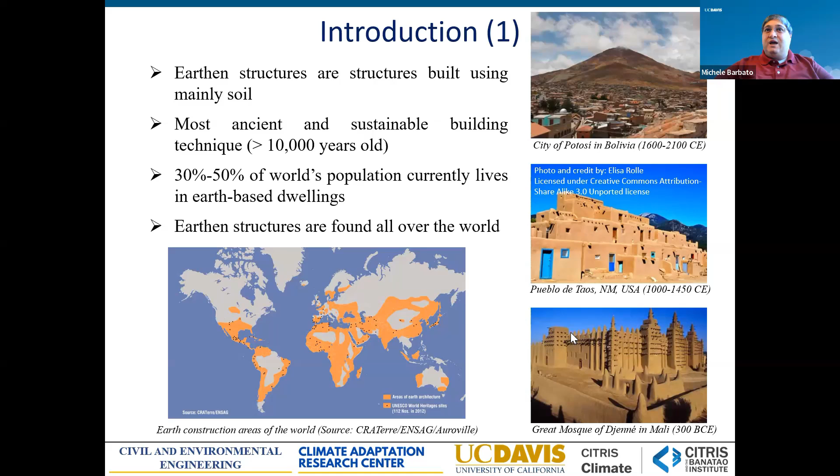And then I have some examples of ancient constructions made by using different technologies based on earthen construction. So it is something that is ancient. And it has been used in different flavors, typically cob, rammed earth, and adobe across the world. These three technologies are slightly different. In cob, fundamentally, you have a slurry of soil that is layered to build walls. In rammed earth, you are using a machine to compact the walls by ramming into them on both sides.

And in adobe, we have probably the most known technology, that is fundamentally a masonry done with bricks that are dried under the sun and then used for construction. Obviously, these are historical technologies. They are important a lot for conservation of existing construction, but there is also a modern flavor to it. And a modern flavor is done by different technologies based on earth blocks.

The three different flavors are compressed earth blocks, where the soil is mechanically compressed to increase the strength of the different blocks that are done without any firing, but only with mechanical energy. Stabilized earth blocks are obtained by adding a chemical stabilizer, typically lime or cement, to increase the durability of the block. And then compressed and stabilized earth blocks, which is the technology that we are working on at UC Davis,

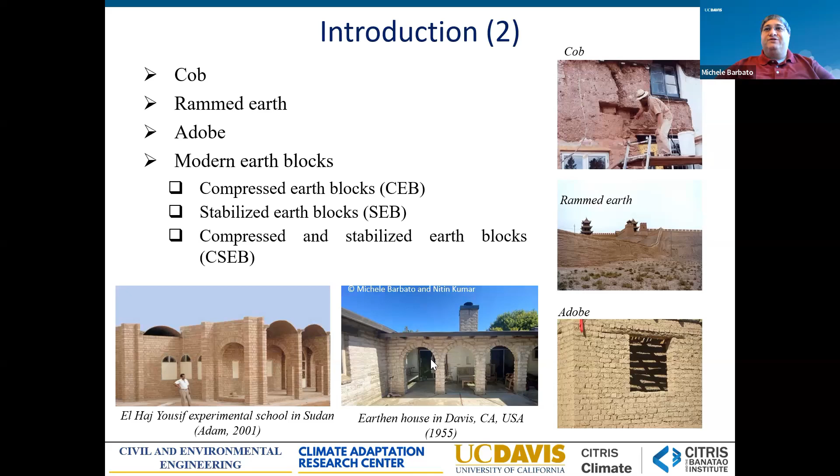where the two technologies are put together to have a block that is at the same time mechanically sound and strong, but also durable under different weather conditions. And again, you can see different examples here, even modern examples of usage of the compressed and stabilized earth block technology, that are, again, very resilient types of structures. So why are we going back to something that is so ancient and trying to give a modern flavor to it? There are actually several reasons.

From one practical point of view, it's the shortage of housing in the US and in other countries, particularly the shortage of affordable housing. And this material is a locally available material that is extremely cheap compared with any other type of construction material. In a larger view, there is a big need for new housing. It is estimated that more than 2 billion new houses will be needed worldwide in the next 80 years, which is a huge amount of housing. This is both for the increase in population, but also for the improvement of living conditions.

And if we are looking at this need, we need to come up with a technology that is also sustainable. Otherwise, we are not going to be able to reach our goals in terms of reduction of our carbon emissions. So there is a need, and this material could be a solution. There is also an interest from a purely engineering point of view. This material has been used for a very long time, but has not been studied as deeply as other industrial materials. It has a very different mechanical behavior than that of ordinary masonry, and we will see that in the next part of the presentation.

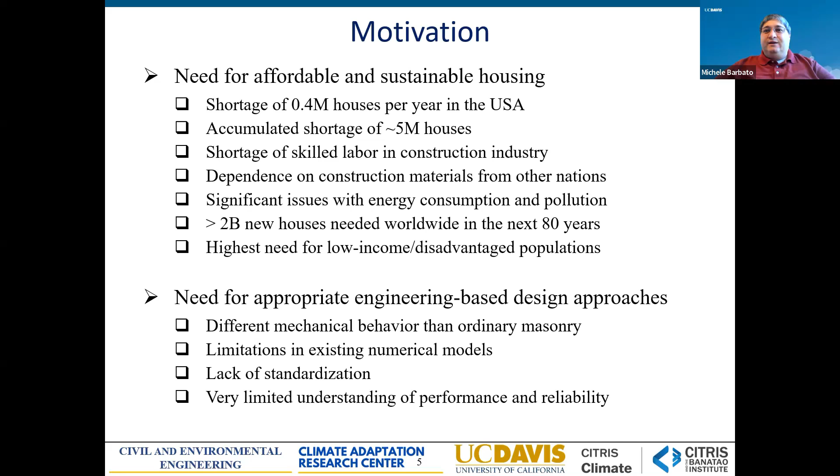And the existing numerical methods that are used for ordinary masonry do not work well for this type of construction. There is also a problem of lack of standardization and a very limited understanding of the performance and the reliability of these structures, which is something that is needed if you want to have an adoption at scale of the technology. So, what are the advantages? The first one is the material is affordable and locally appropriate.

Here there is a USGS map of the classification of the soil across the United States, and then the triangle of classification used by the US Department of Agriculture. If you look at the region included in the red line, this is the composition of soil that can provide earth blocks that are performing well from a mechanical point of view without any addition of chemical stabilizers. If you look at the region included in the dashed yellow line, you actually see how this composition can be expanded by using a moderate or small amount of chemical stabilizer.

When you map it onto the United States map of soil, you actually find that almost everywhere, except in the deltas of rivers where the amount of expansive clay is very high, you can find soil that can be directly used for construction of structures by using compressed and stabilized earth blocks. The fact that the material is locally available makes it extremely affordable. There is a reduction in cost on transportation, and obviously whenever there is that reduction, there is also an additional advantage of reduction in emissions.

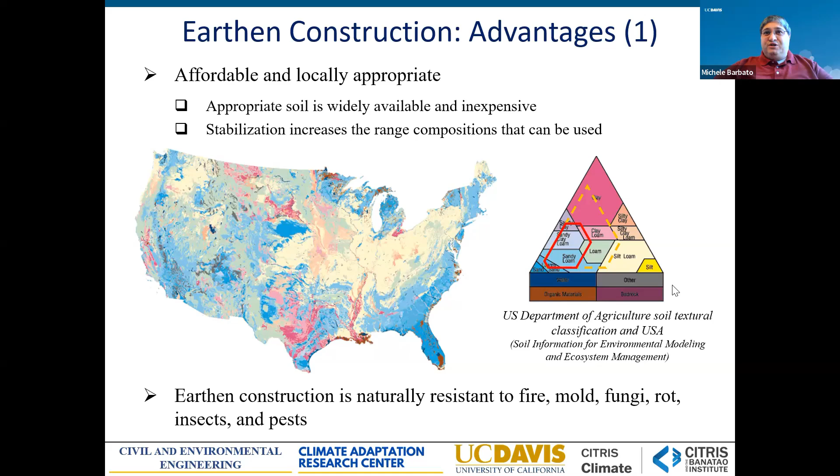In addition to that, the structures made with this material are naturally resistant to fire, mold, rot, insects, pests, and termites, because it's fundamentally soil, and these type of actions cannot damage soil. Also, this is a breathable material, able to maintain a healthy relative indoor humidity by taking excess humidity out of the air when it's too humid, and releasing it back when it gets too dry. So it's a natural way of keeping indoor humidity in a healthy range. It also doesn't release any volatile organic compounds that can be bad for human health.

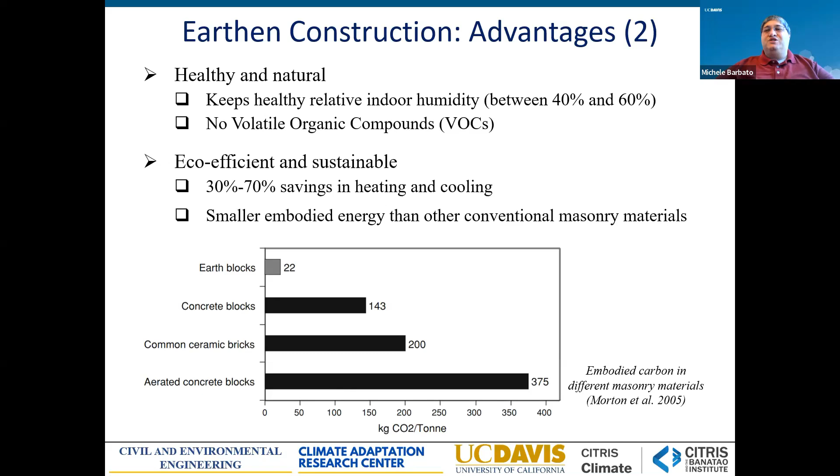And then it is eco-efficient and sustainable. On the side of operational energy, it has been shown that it can produce a 30 to 70% savings in heating and cooling compared with a light-framed wooden house, depending on the climate where it is built. But also, it has a smaller embodied energy than other conventional masonry materials. Here you can see the equivalent CO2 per ton of material in kilograms for earth blocks compared with concrete blocks, ceramic blocks, fired clay blocks, and aerated concrete blocks.

So the embodied energy is lower and the operational energy is lower. In addition, recent research, some of which was performed by my research group with collaborators, has shown that this type of construction has good resistance to hurricanes, tornadoes, and with appropriate reinforcement, also earthquake actions.

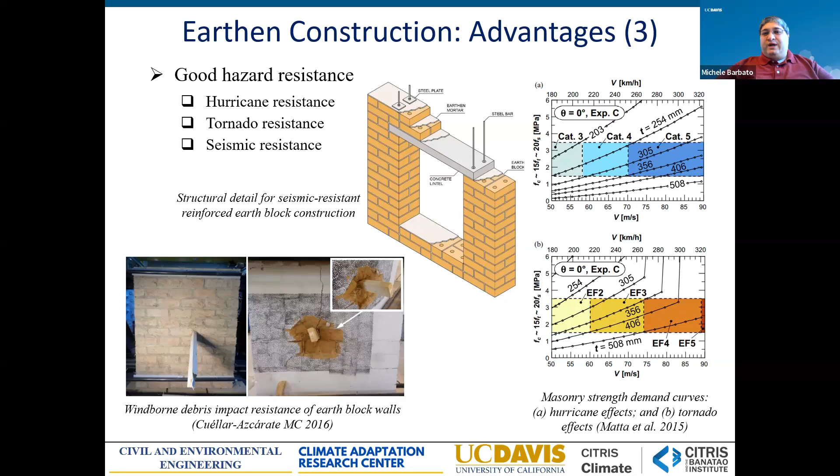So with all of these nice things, there are obviously also challenges. Otherwise, we would already see this type of construction used in modern construction everywhere. One issue is the high variability of the mechanical properties. This high variability comes from the fact that the material is a natural material, and thus there is less possibility of control than with industrial materials that are produced under very controlled conditions. The result is that there is higher dispersion whenever mechanical testing is performed.

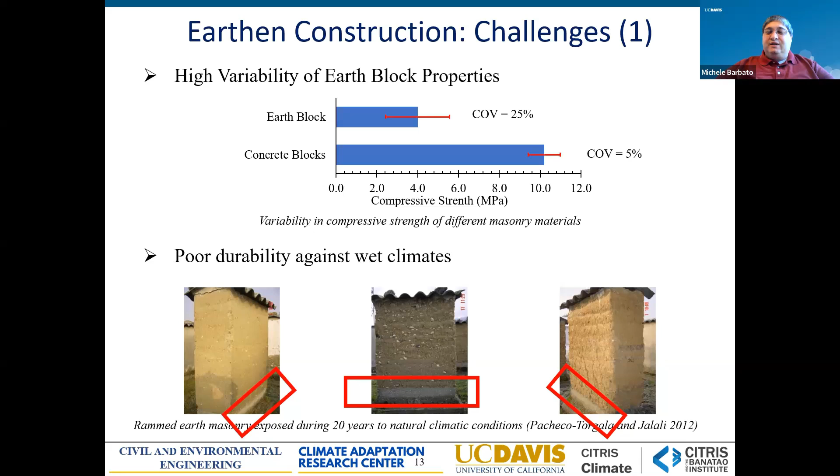There is also an intrinsic problem with any type of earthen construction, which is poor durability in wet climates. There's a historical test that was done on a rammed earth wall that shows how humidity from the ground, coming up and down through capillarity, can produce damage in the walls. In addition, it is a masonry product, so it has an intrinsic characteristic of brittleness, which means it reaches its peak strength and then breaks really, really fast.

In addition to these technical issues, there are some other issues that are beyond technical. One is that it's labor intensive, meaning it's costly in places where labor is expensive. And the worst issue, even though it's not technical but more cultural, is the perception that earthen construction is a substandard choice when compared with other modern industrial types of construction.

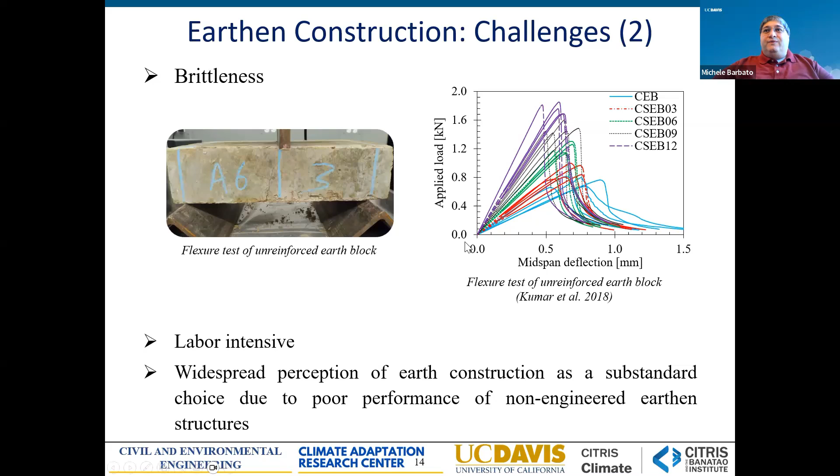But this perception is really driven by the poor performance of non-engineered earthen structures in different parts of the world, to which I would add that when a structure is not properly engineered to sustain the loads that will be applied during its lifetime, any type of material will perform poorly. So there are technical issues and cultural issues that need to be addressed.

To give a better idea of what we're talking about, I'm showing some of the blocks we can produce using soil. These are compressed and stabilized earth blocks of different shapes. You're seeing in the video some of our students building a block, fabricating it using our first version of a modified Cinva Ram manual machine for making blocks. As you can see, it's quite a laborious process.

However, you can also see in our picture a machine, an Auram press, a semi-automatic hydraulic press that makes this work significantly faster and less laborious. With our original Cinva Ram, we were able to build about 30 to 40 blocks per hour, with a crew of students exchanging positions. With our hydraulic press, we can produce between 300 and 400 earth blocks in the same hour of time.

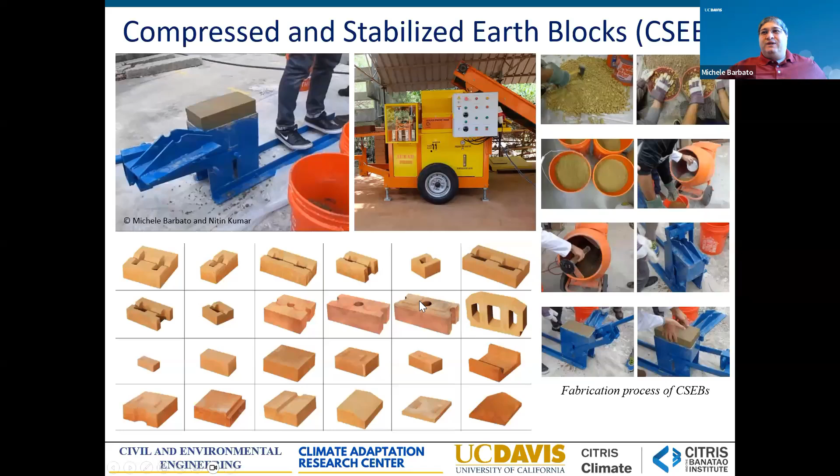Now we know what we are talking about. I want to present a couple of studies that we completed several years ago.

One on the feasibility of using these houses, and I will start with that. This was a feasibility study performed in the U.S. Gulf Coast, in the Gulf of Mexico, precisely in southern Louisiana. This study was trying to address the need for affordable hurricane-resistant housing in southern Louisiana in the aftermath of Hurricane Katrina.

There were about 400,000 low-income households in need of housing. The place was particularly bad for this type of construction. One, because the soil quality is poor. Again, we are close to the delta of the Mississippi River, with a lot of expansive clay. The climate is hot and wet, which is also difficult for earthen construction. And then we have high wind loads from frequent hurricanes affecting that region, and we needed to keep the cost low. We also needed solutions that were culturally appropriate so that people would feel comfortable using these type of houses.

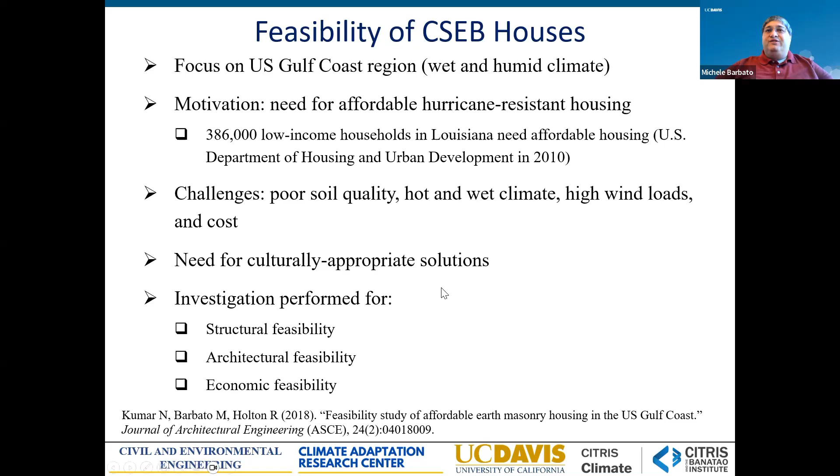We investigated the structural feasibility, the architectural feasibility, and the economic feasibility of these homes.

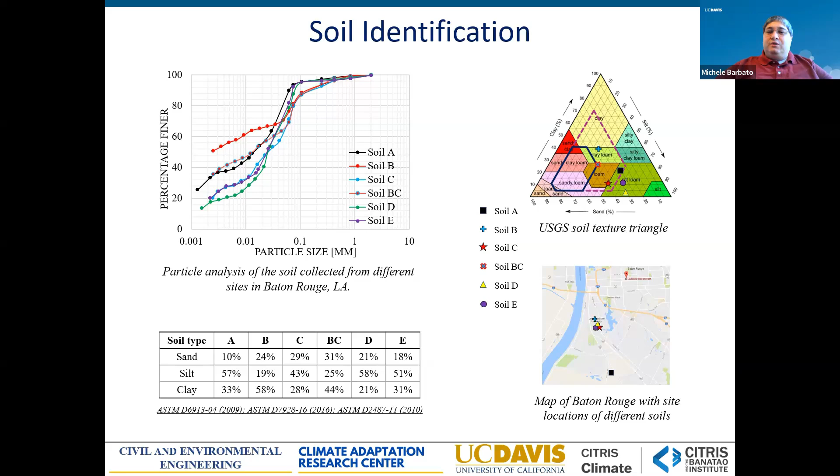We started by identifying the soil. We took soil from around the campus of Louisiana State University, along the Mississippi River. If you look at the USGS soil texture triangle on the right top of this slide, you will see that all of the soils we found were outside of the optimal region identified by this blue line. But most of them were inside the region where chemical stabilization could be adopted to build this type of construction.

So what we did, we used cement to improve the mechanical strength and durability of this material. We started with a block made with only soil, and then we added cement, from 3% of the mass of the dry material up to 12% cement.

And then we performed flexure tests, compression tests, and durability tests, and the compression tests were performed both in dry conditions and in wet conditions.

What we found is that most of our compositions had a sufficient modulus of rupture, the value obtained from the flexure test that really measures the behavior in tension and the brittleness.

Then with at least 6% cement, we had sufficient compressive strength. And then in order to achieve a compressive strength under wet conditions as suggested in the literature, we actually had to use a relatively large amount of cement, 9 and 12%. Again, this is mainly due to the fact that the soil was not the best soil to start with.

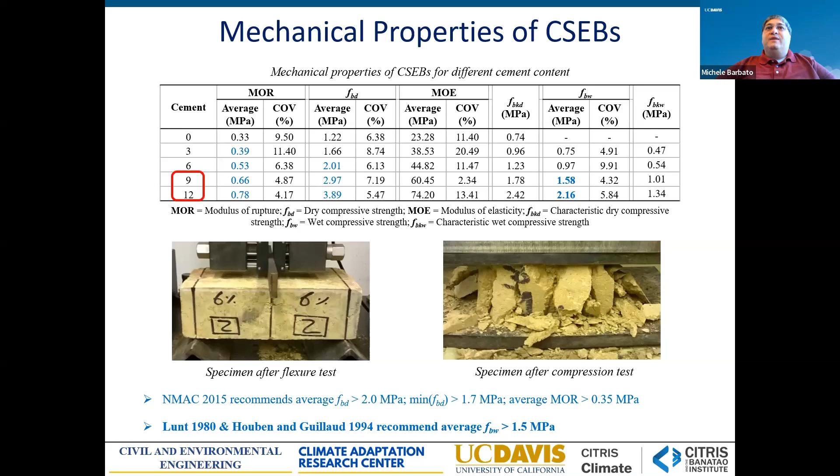The first issue we wanted to identify is how do we protect this material from the wet, humid conditions of southern Louisiana. Here you can see the results of a test we did by building a small wall outside of the LSU campus, where one side of the wall was protected with a composition of soil and cement similar to the one used for building the blocks, and the other was left unprotected.

You can see that on the unprotected side, very soon... this was a 6-month test during which we actually had two tropical storms, so it was short but pretty intense as a test. On the side left unprotected, the mortar between the blocks is washed away by the heavy rain and wind, and this produces mechanical damage to the bricks, which are no longer fully connected.

On the other side, the one protected by our soil cement—let's call it stucco, although it's not really a stucco, just a layer of protection—we actually see no damage. Not only that, but when we finished our 6 months of testing, we carefully dismantled the blocks from both sides and retested them for both flexure and compressive strength. What we found was that the protected side actually ended up being stronger than the initial strength obtained from the blocks before they were put in place.

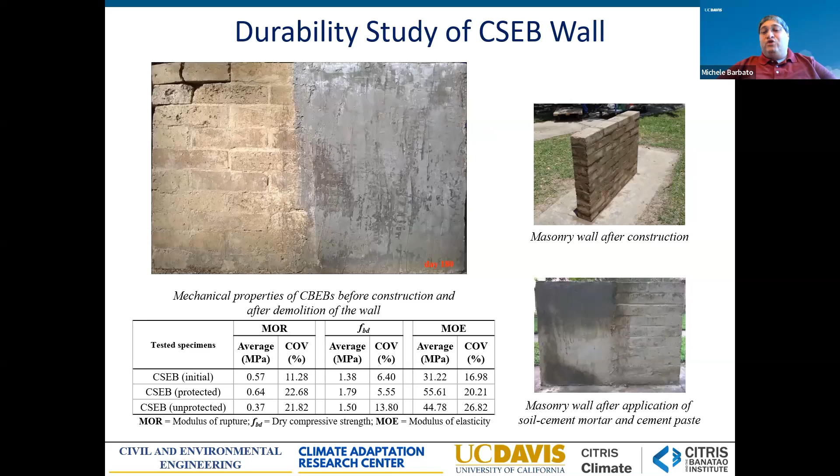We performed further investigation of the engineering performance of these houses subjected to wind actions. We came up with this graph that allows us to design the needed thickness of the wall in order to design according to ASCE for different wind speeds at different locations in Louisiana. On the horizontal axis we have the design wind speed from ASCE. The vertical lines are the wind speeds corresponding to different towns in southern Louisiana. The horizontal lines are the mechanical strength of the blocks with 9% and 12% cement, and the other colored lines correspond to the different wall thicknesses needed to sustain each design wind speed.

So, for example, if we want to design a house for New Orleans, which has a design wind speed of about 65 meters per second, we can use a 9% cement block with a thickness of 35 centimeters, the purple line, or we can use a 12% cement block with a thickness of 30 centimeters, the red line.

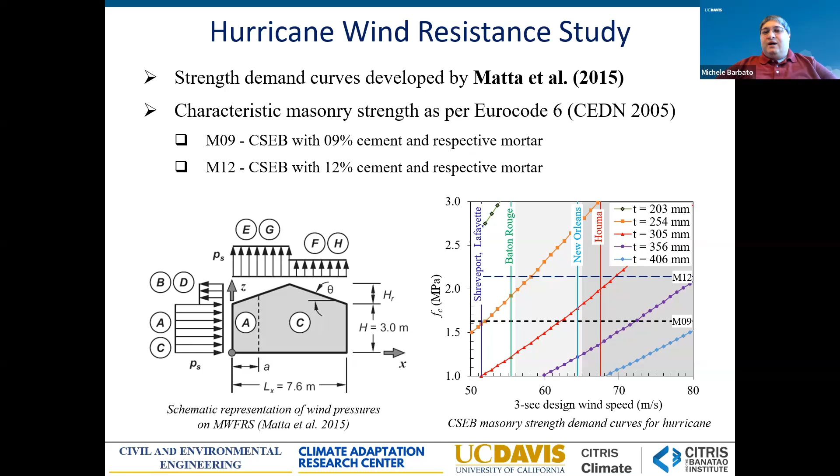We also did an economic feasibility study, and here we devised a new technology for building these structures that are typically built using brick and mortar approaches. We developed a technology based on interlocking blocks that can be done without having to use mortar to transfer the lateral loads across the different blocks.

We compared the cost of this new technology, the interlocking compressed and stabilized blocks without mortar, to ordinary CSEB with mortar, light frame wood construction, which is typically used in 95% of housing in the US, and fired clay bricks and concrete blocks.

Fundamentally, the difference in cost comes from the wall construction. We found that by using an interlocking construction without mortar, we were able to match and even be a little lower than the economic cost of building a light framed wood structure. This comparison was done for a reference shotgun prototype house of 1,000 square feet. So there is actually the possibility of building these houses at a lower cost than the current technology of light frame wood.

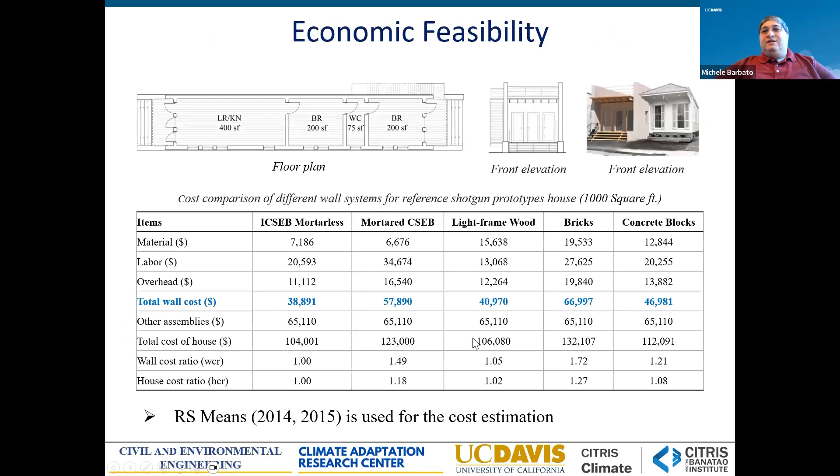Given this result, we started investigating how to predict the performance of this type of construction. We started developing a micro modeling approach for finite element modeling of this earthen construction. Here, just to give you an idea, there are two main approaches.

The micro modeling approaches used for masonry: there is the simplified micro modeling approach, where the masonry units and the mortar are modified in order to reduce the computational cost. Fundamentally, the mortar layer is reduced to a zero thickness joint interface, and the masonry units are expanded to account for half of the thickness of the mortar layer. This allows a significant reduction in computational cost because all of the nonlinearities can be attached to the mortar joint interface. This is valid as long as the failure modes of the system all happen along the mortar, which is typically the case for ordinary masonry, where the mortar is typically the weak spot in the structure.

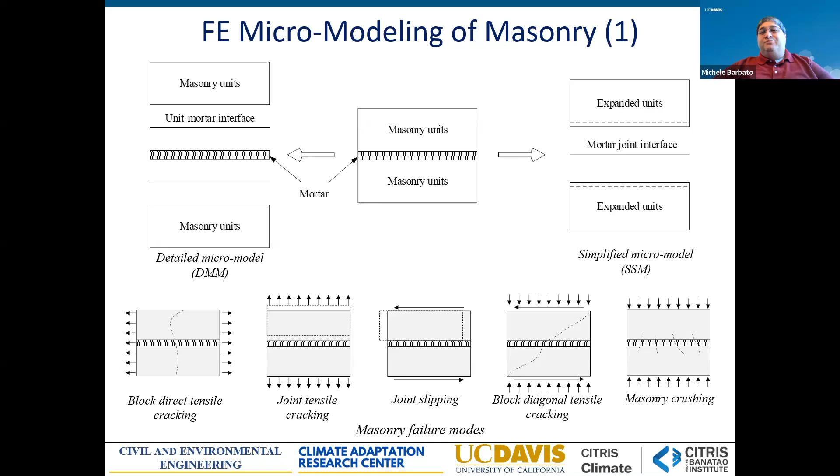However, there is also another approach that is less used because it's more computationally expensive: the detailed micromodeling, where all of the different components—the masonry, the mortar, and the interface between masonry and mortar—are modeled separately and independently. This is called a detailed micromodel approach. In the literature, you will find very few applications of this methodology because for ordinary structures, it is more expensive but gives similar results as the simplified micromodel.

I'm going to show it here. By using the detailed micromodeling approach for an ordinary masonry wall for which experimental data are available, represented by these black lines, we were able to model the behavior of this structure in a relatively accurate manner. You can see this blue line is our numerical simulation compared with the experimental results. On the left side, you can see the development of the principal stress, principal strain, and plastic strain, as well as the development of cracking within the structure, which again has very good correspondence with the experimental results.

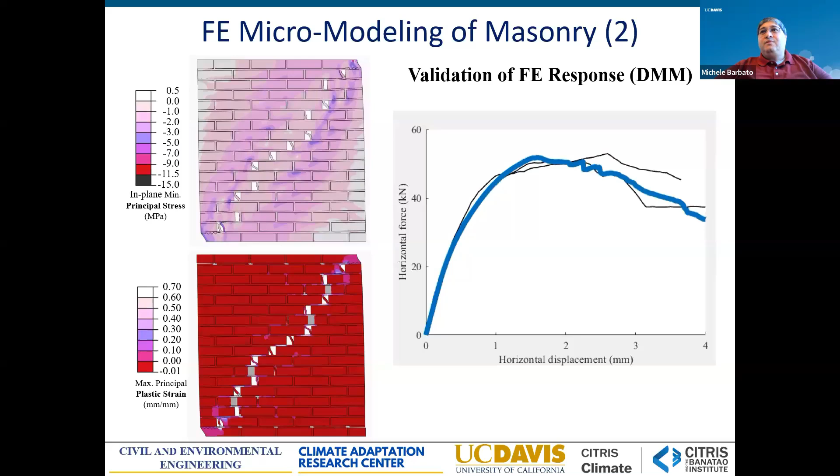So what we found is that by using different flavors of the simplified micromodeling approach and the detailed micromodeling approach, we obtained very similar results. Yes, the detailed micromodeling approach is slightly more accurate, but fundamentally we are capturing the global behavior as well as the development of cracking in the structure using the simplified modeling approach too.

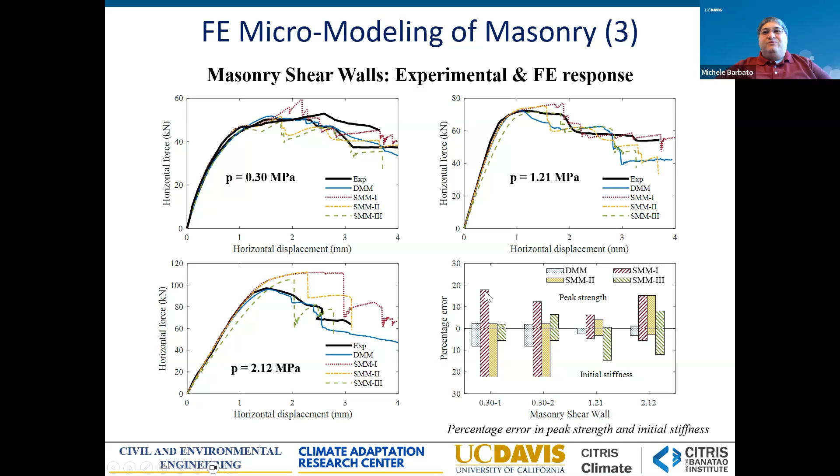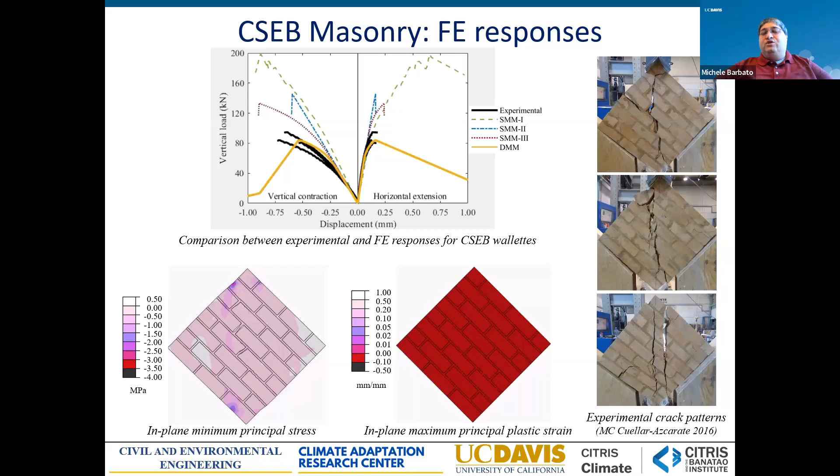This is the yellow line corresponding to this new modeling, as well as the principal stresses and the principal plastic strain in the wallette, where the light color corresponds to where the cracking is developed. You can see that even visually there is a very good correspondence with the experimental results. So as a conclusion, this type of modeling, although more expensive, is necessary in order to capture the real mechanical behavior of earthen construction.

Now, these were two projects that were completed. I'm going to move on to something that is still ongoing, but extremely exciting: the use of earthen construction for homes that are fire resilient. Here you can see why we want to use this material for houses built in the wildland urban interface, because fundamentally earth blocks are non-combustible materials while we are building with wood right now.

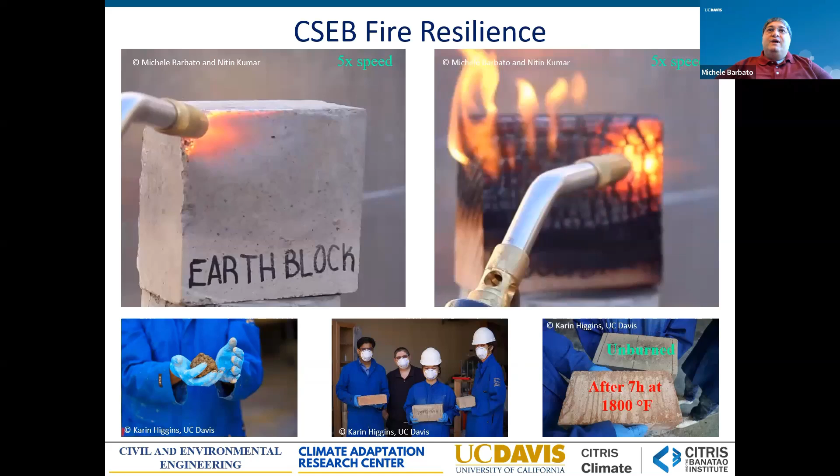And wood obviously burns. Not only that, but you can see that fundamentally, even under a propane torch at 3400 Fahrenheit, the only effect you can see on our blocks is a change in color. We tested our blocks in a furnace for a very long period of time at very high temperature. I'm going to show some of these results.

We fabricated 60 blocks with the CINVA-Ram using a soil that was collected from the town of Paradise in California, the town that is unfortunately famous for being completely destroyed by the Camp Fire in 2018. With that soil and 9% Portland cement, we fabricated these blocks.

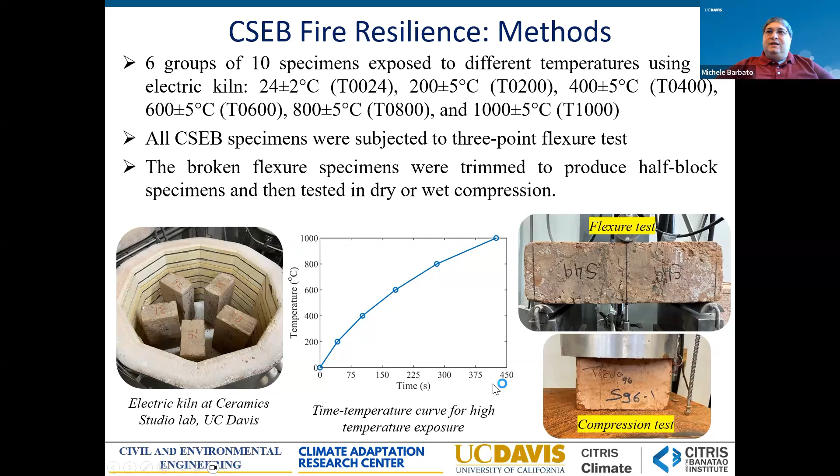Then we divided them into 6 different groups subjected to different temperatures in a furnace. We left 10 blocks at room temperature, and then 10 were tested at 200 Celsius, 400 Celsius, 600 Celsius, 800 Celsius, up to 1000 Celsius for a prolonged period of time. After this, we tested them first on a 3-point flexure test, then took the 2 halves obtained from that test, trimmed them, and used them for compressive strength in dry and wet conditions. So what we found?

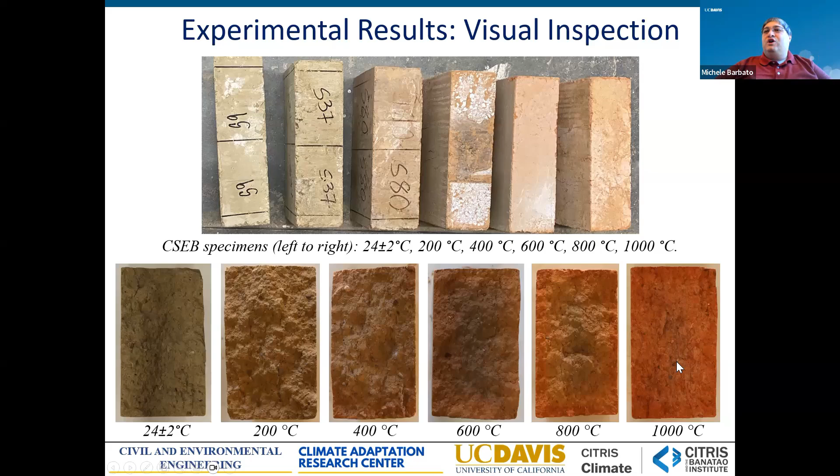In terms of experimental results for the 3-point bending test, we found a reduction in bending strength with a lot of variability, so barely significant from a statistical point of view, but absolutely not negligible. However, even at 1000 Celsius, we found that the final modulus of rupture is still above the minimum requirement of the New Mexico Administrative Code, which right now is the only code in the US that really allows construction using this type of material.

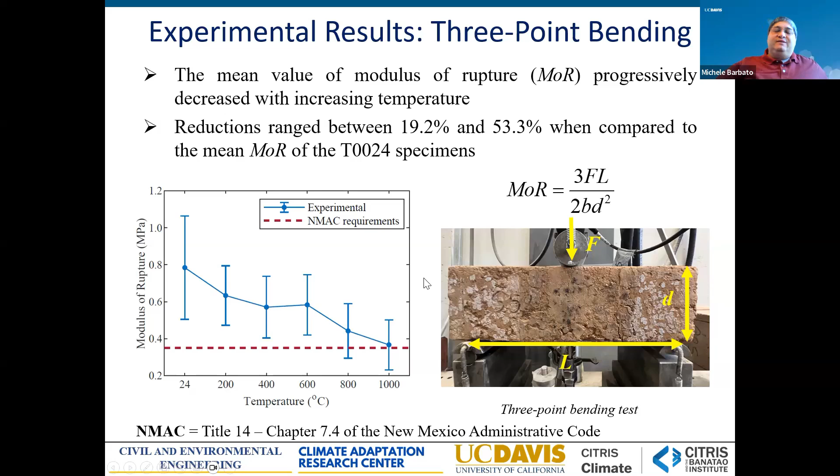We actually found that the reason for this reduction of strength was the high amount of cement. So we are investigating ways of making these blocks more resilient to fire and more sustainable. However, there were other things that were also interesting.

We did these compression tests, and in the dry compression test, again there is a slight decrease of strength from 200 to 600 degrees, and then a stabilization. But in reality, this reduction is not statistically significant. So from a statistical point of view, there is no reduction in strength for the dry conditions.

However, for the wet compressive strength, and this was a little bit more surprising although in hindsight it made sense, we found that the strength is actually increasing significantly. We went from about 2.5 to almost 8 megapascals of wet compressive strength. That is because we are fundamentally transforming our unfired clay blocks into fired clay blocks with fire, which are known to be equally resistant under wet conditions. So the material actually got stronger.

And so all of this is kind of indicating that the material can be used very effectively to obtain a structure that will not burn under fire, and that will still keep its structural integrity to be reused even after fire.

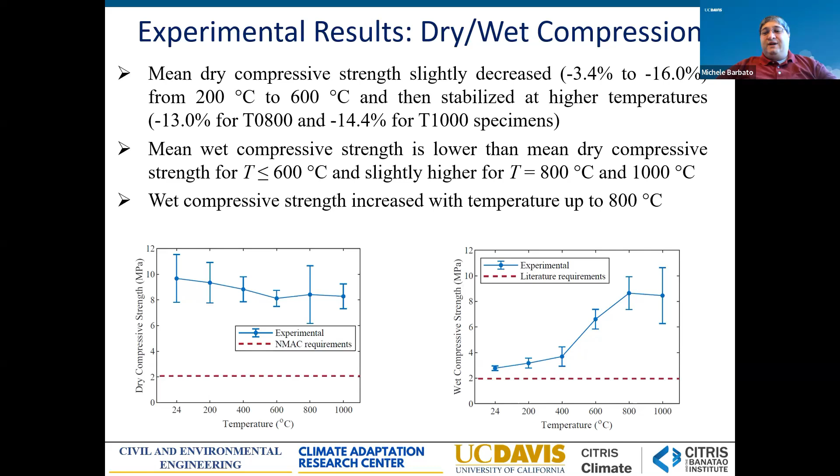Another thing we are investigating right now is assessing wildfire emissions from housing. The idea is to get information about the houses, burning conditions, and emission factors from controlled lab experiments to estimate the CO2 equivalent produced by a house built with different technology that is burning. When we combine this with the life cycle CO2 equivalent, we can estimate their contribution to emissions. This is part of a closed circular economy approach to housing, where we need to include the effect of wildfire emissions for a good estimate of emissions produced. In this part, I will focus on estimating carbon production from burning of houses.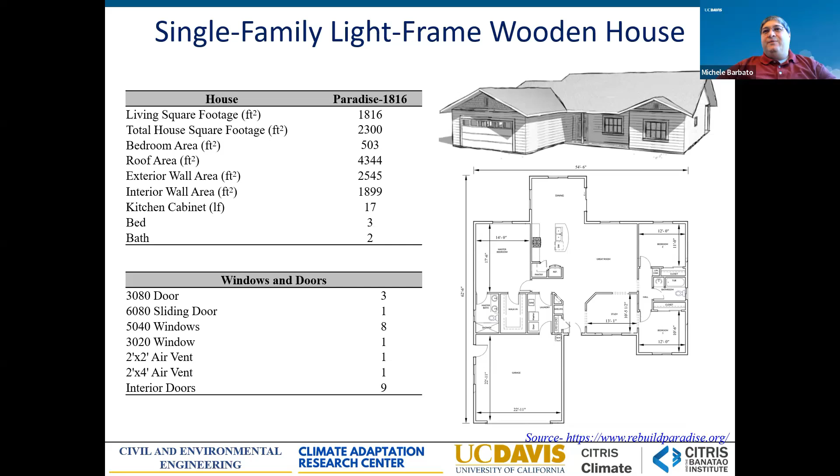The same approach can also be used to assess particulate matter and other pollutants dangerous for human health. What we did was take the design of houses used for reconstruction in Paradise, evaluate all the materials used for construction depending on size, and then evaluate it for different technologies.

In particular, we considered three different conditions: a light frame wood construction that is non-compliant with Chapter 7A of the California Building Code, representative of older structures not in compliance with new building codes; the same light frame wood construction that is compliant with Chapter 7A; and an earth block construction, which is also compliant with Chapter 7A.

In terms of costs, we found that the non-compliant house, as expected, is the cheapest. But the earth block construction, due to the inherent resistance of earth blocks, can actually be built at a lower cost than the California Chapter 7A compliant structure.

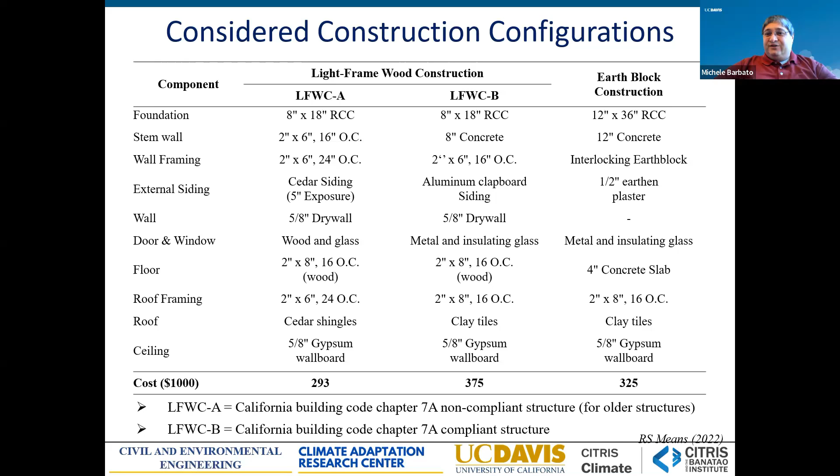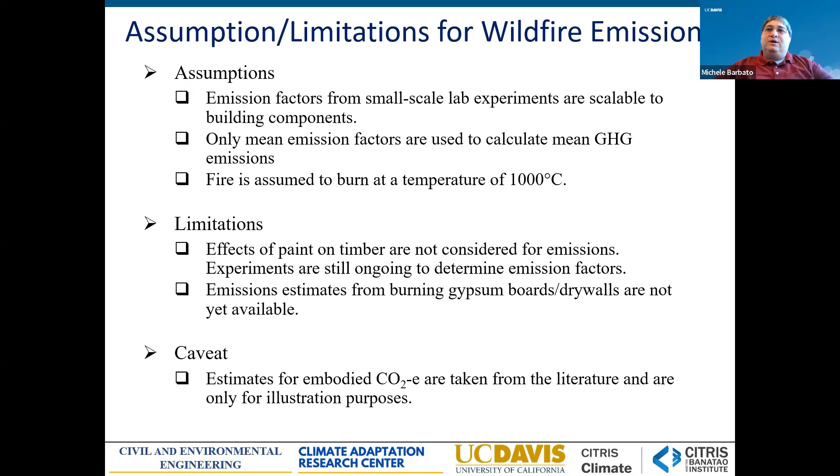We made a bunch of assumptions because we are still calculating emissions factors from small-scale lab experiments. We assume these results can be scaled to larger scale. We did this analysis only using mean values of the emission factors, and assumed the fire is burning at 1000 Celsius. Some elements are still missing, like paint - we don't have the data yet - and some other small or not yet available quantities were also excluded. For some materials where we evaluated embodied carbon, we used results available in the literature.

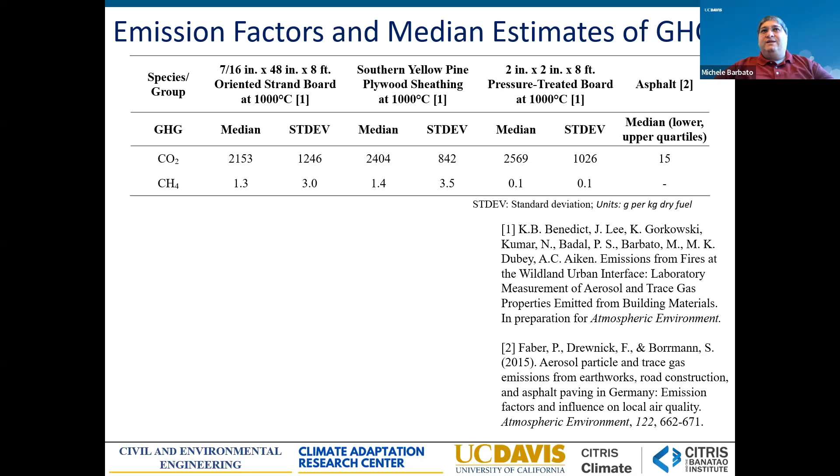So what were we trying to get? We evaluated emissions in terms of carbon and methane, and for each different structure, evaluated the emissions from burning. When we put it together with the life cycle analysis, we found that the earth block construction has an embodied energy that is fundamentally the same as a wooden house.

But if we include the effect of emissions from burning of the house, for the earth block construction, all of the burning and emissions come fundamentally from the content and things that are added, while the entire structure will burn for wooden houses. The end result is that the emissions of an earth block construction are less than half the emissions of a light frame wooden house, with the difference that you still have a house at the end of the day, while for the wooden house there is only ash.

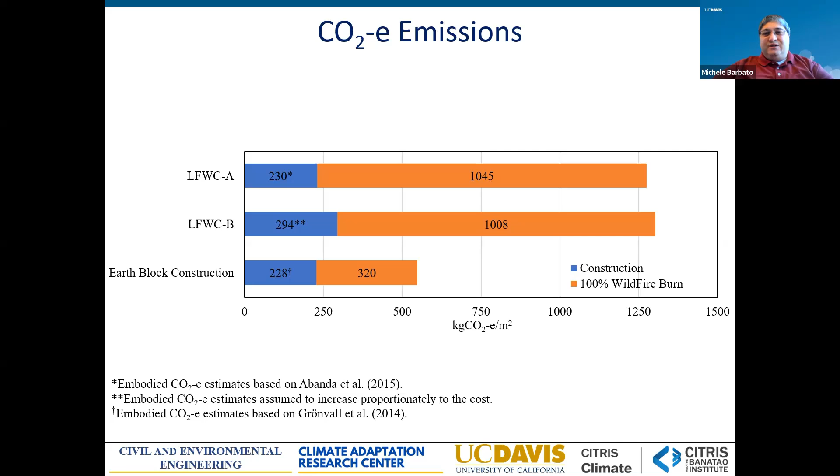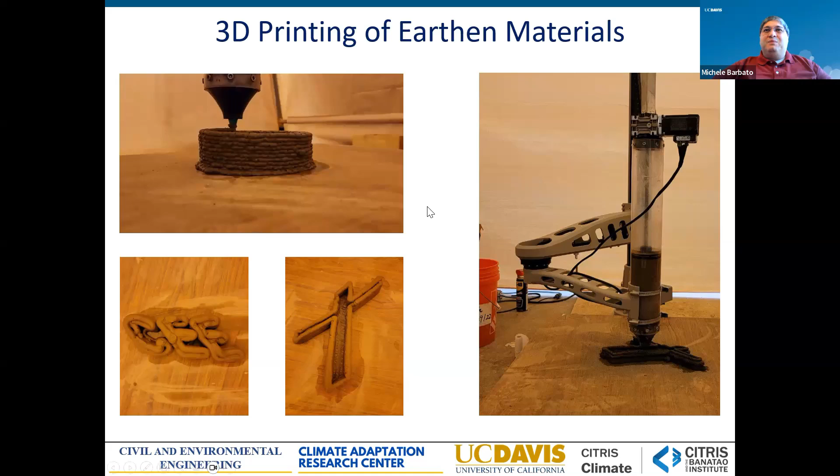I'm going to wrap it up, I think my time is finished. So what are the results of our research?

Earthen masonry represents an affordable, safe, and sustainable technique that can be used for building houses and low-rise buildings. These houses can be designed to perform properly according to modern codes and standards under seismic, hurricane, and tornado actions. We have also shown that detailed micro modeling is needed in order to accurately predict the performance and mechanical behavior of this type of walls and structures.

Compressed stabilized earth block materials can be used as a fire resilient construction material that can reduce cost, increase resilience, and also reduce emissions. And then 3D printing of earthen material is a promising technology that deserves to be investigated.

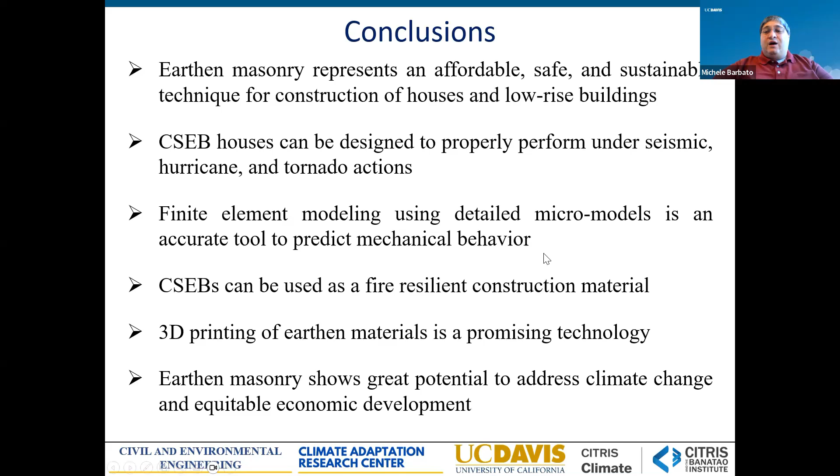Let me finish by saying that earthen masonry, due to its affordability and the fact that the material is locally available, has great potential to address climate change, but also to produce economic development in an equitable manner, which I think is very important in our fight against the issues produced by climate change.